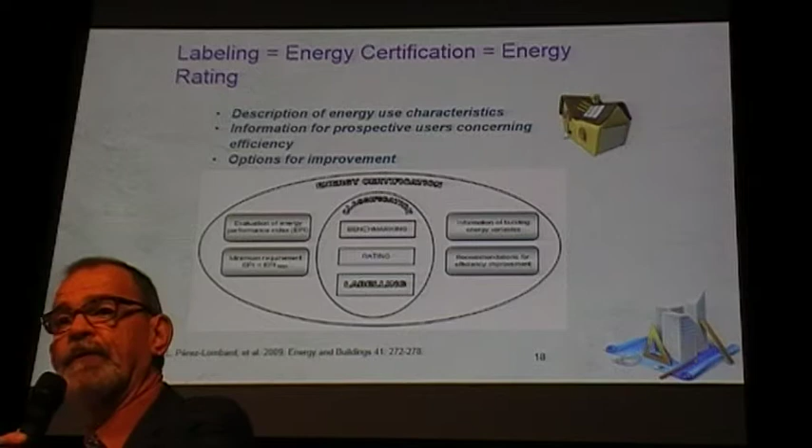And finally, we also call a lot of what we do the same. We say energy labeling is energy certification, is energy ratings, right? Again, all of it means the same thing. So when you're talking to engineers or facility managers or people in the business or the industry and they're using these terms, they are all talking about the same thing.

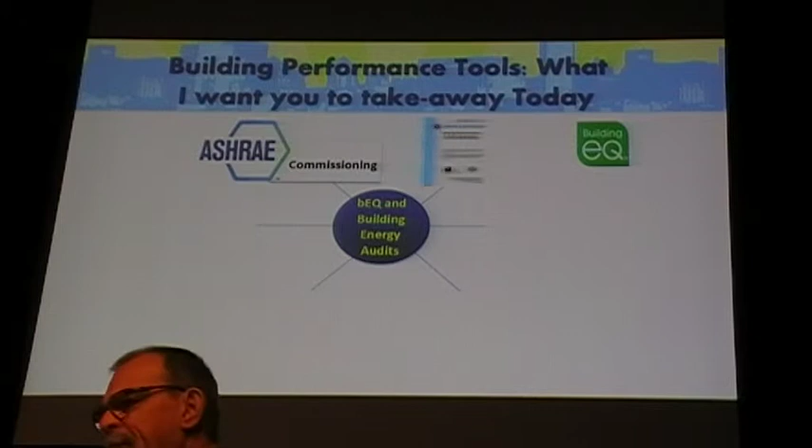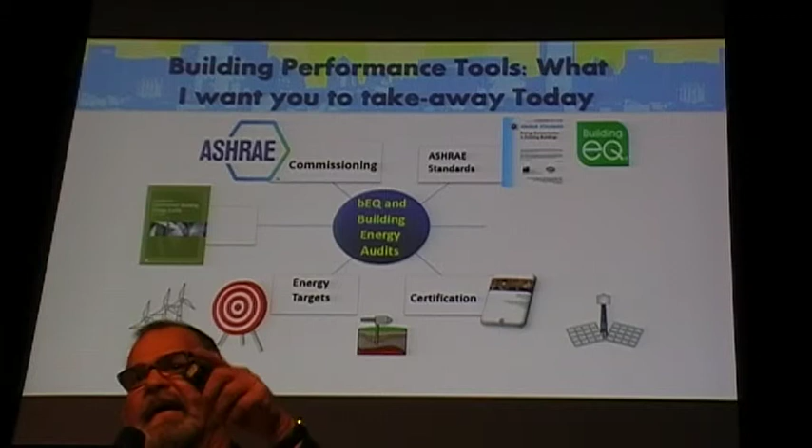So, when we talk about building performance and how a building performs, there are a lot of things that make that building perform. For sure, BEQ is one, but there are a lot of other things that make buildings perform: commissioning, ASHRAE standards, BEQ of course, making energy targets, using energy audits, energy ratings, energy labels - that's another good way. And of course, one of my favorites is becoming ASHRAE certified so that you can do those energy audits and those energy assessments and that energy modeling so that you can actually do that in a standardized way and things like that.

And finally, we never want to forget about the natural resources and the emissions and the great earth that we live in. We still need to protect that, both the indoor air quality inside the building as well as the air quality outside the building.

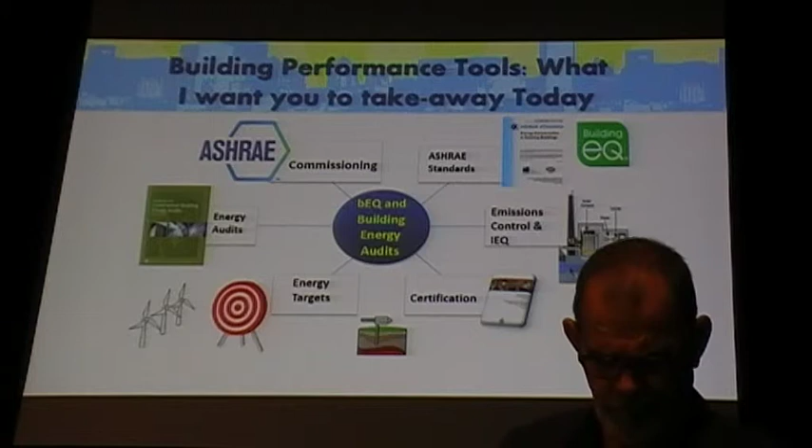Por un lado, lo que tiene que ver con la auditoría energética implica un montón de herramientas para hacerlo, como por ejemplo los estándares de ASHRAE, los targets energéticos que se pongan a nivel de códigos constructivos de la ciudad o a nivel del propietario del edificio. También a nivel de certificaciones que se puedan adquirir, y recursos bibliográficos sobre cómo auditar energéticamente un edificio. Implica un montón de cosas hacer esta auditoría energética.

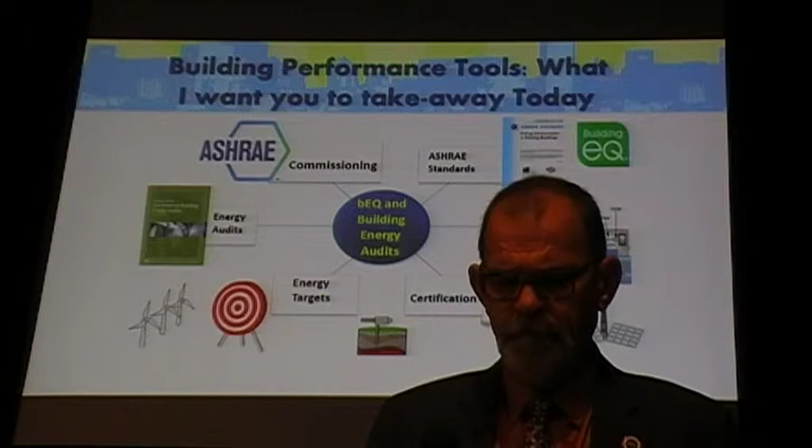Dentro de las cosas que hay que tener en cuenta también está el medio ambiente, como ya habló Nicolás hace un ratito. Son muchas las cosas que se tienen que tener en cuenta cuando hacemos este análisis de auditoría energética.

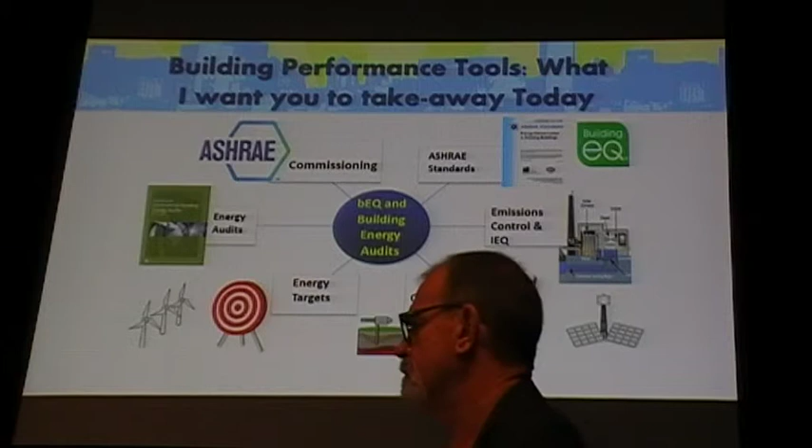Una de las cosas que menciona Ross, que también importa mucho, es que una de las personas mejor preparadas para hacer una auditoría energética es una persona certificada por ASHRAE como BEAP, el Building Energy Assessment Professional, una certificación que implica estudiar un montón de normas y procedimientos de auditoría de edificios. Es una de las cosas que promociona ASHRAE, hacer uno estudiar y certificarse para poder manejar todas estas herramientas. Es una de las personas mejor preparadas para hacer este etiquetado de edificios, algo que la asociación también quiere difundir.

Speaking of certifications, ASHRAE offers 6 certifications, but speaking about building energy quotient, BEQ focuses on the building energy modeling professional and the building energy assessment professional certification.

Como decía recién, hablé de una certificación particular que era la de BEAP, que es una persona que se encarga de la gestión integral de la certificación. ASHRAE lo certifica a través de un examen, que son eso que comentaba Florentino hace un ratito, que participamos del examen hace un día ayer, que se dieron acá en Argentina.

Hay otra certificación relacionada con el commissioning energético de los edificios, con el etiquetado, que es el Building Energy Modeling Professional, una persona capacitada para hacer el modelaje y la simulación energética de los edificios. Es otra certificación relacionada con lo que hablamos hoy de auditorías energéticas de edificios.

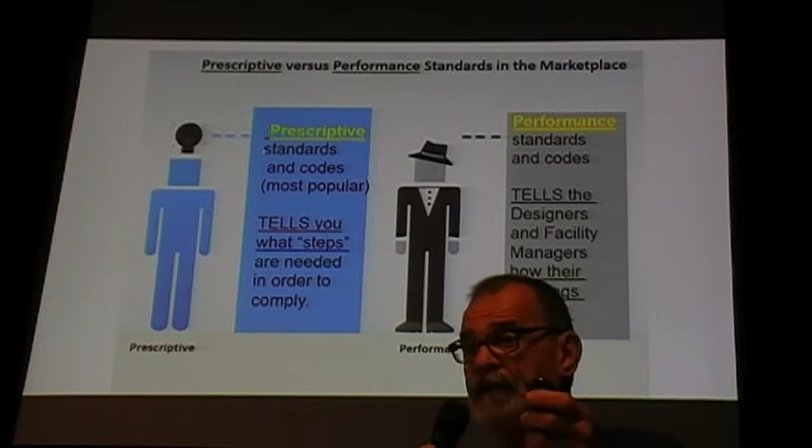This is an example of standards that we will use. When you see the following slides, I will show you copies of standards. Our standards are prescriptive standards or performance standards. Our prescriptive standards tell you what steps to take in order to be approved by that standard, and our performance standards tell you the performance criteria that design has to meet to be approved. So those are the 2 main types of standards that ASHRAE produces.

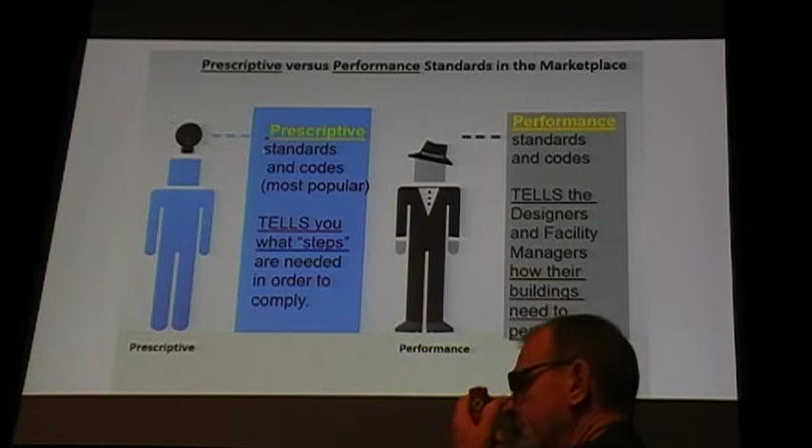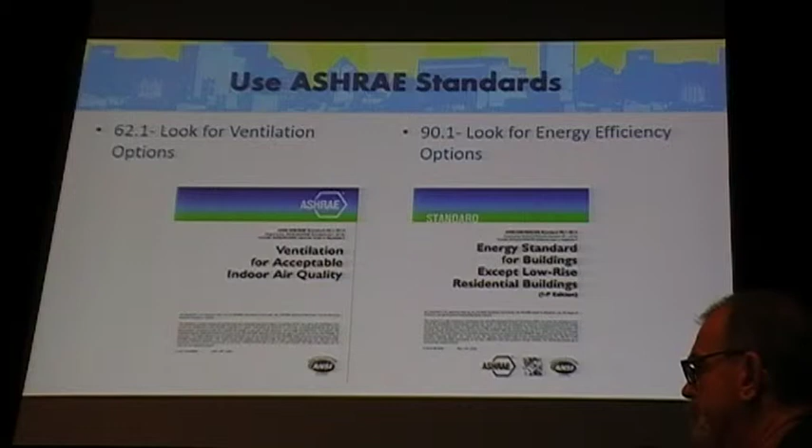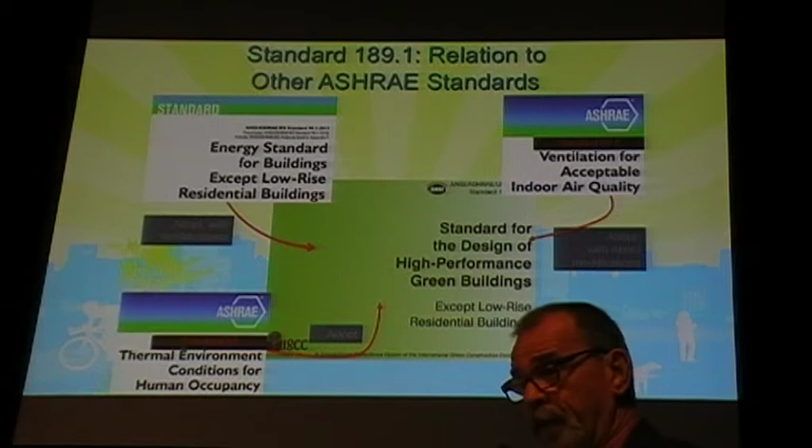This is our ASHRAE High Performance Green Building Standard 189.1.

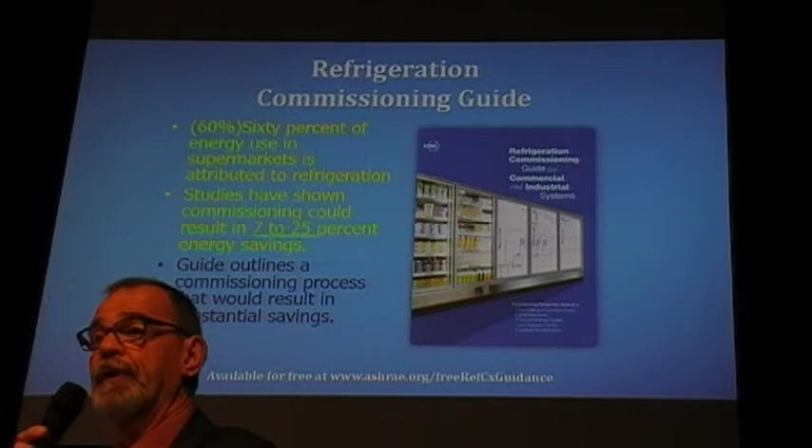This is a refrigeration commissioning guide for refrigeration systems.

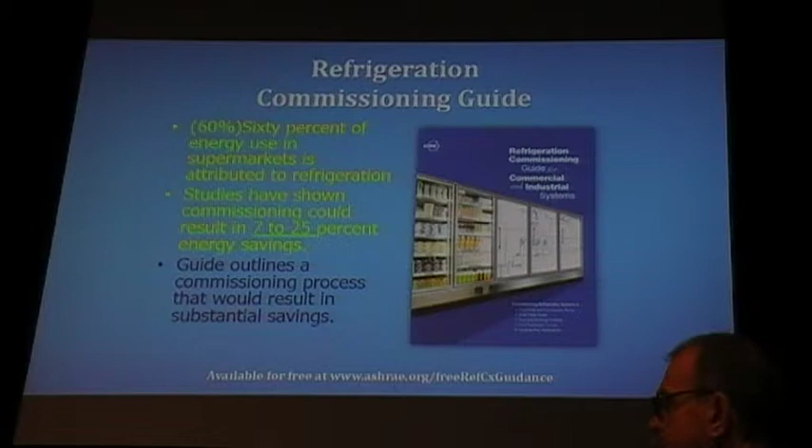We also offer our ASHRAE handbooks now online, so you can still ask for the book, but you can also ask to have your handbooks online when you fill out your annual registration, your annual payment of the invoice each year.

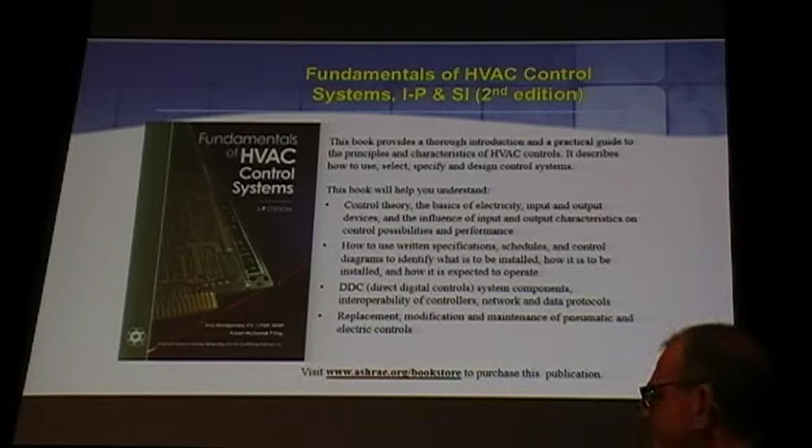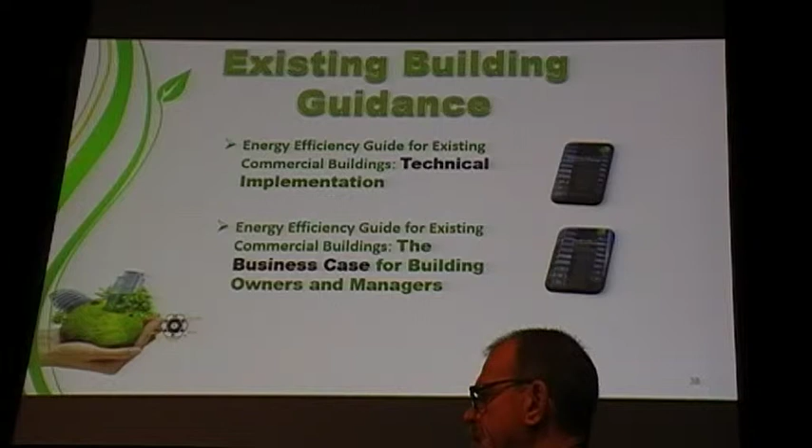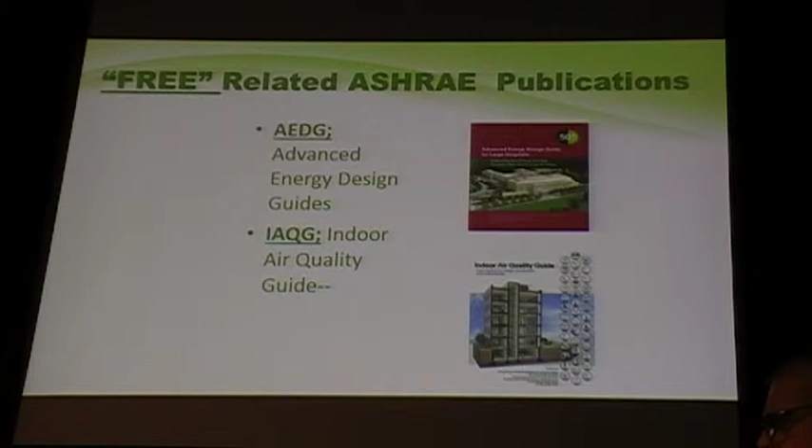And finally, this is not an ASHRAE publication. This is a publication from the U.S. Army Corps of Engineers. But it's a really, really good publication showing you how to control the air pressurization and the air tightness within buildings. So I include this in my presentation because it's available for free as a free download from their website, and it's an excellent resource.

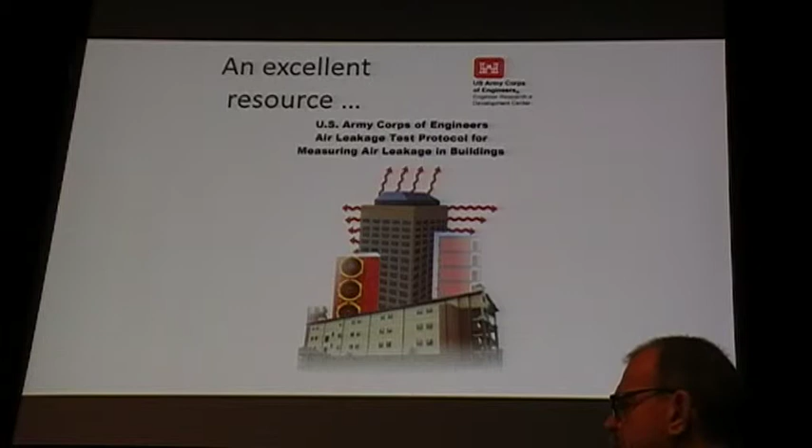So those were a lot of books, right? A lot of publications, a lot of books. But when we do a BEQ submission, we use information from all of those publications at some time, at some point, on some buildings. We use the standards, we use the energy audit information. If we're trying to make energy conservation measures and make the building better, sometimes we have to make the building more airtight. So we're always using these publications to make those buildings better and to try to achieve a higher grade.

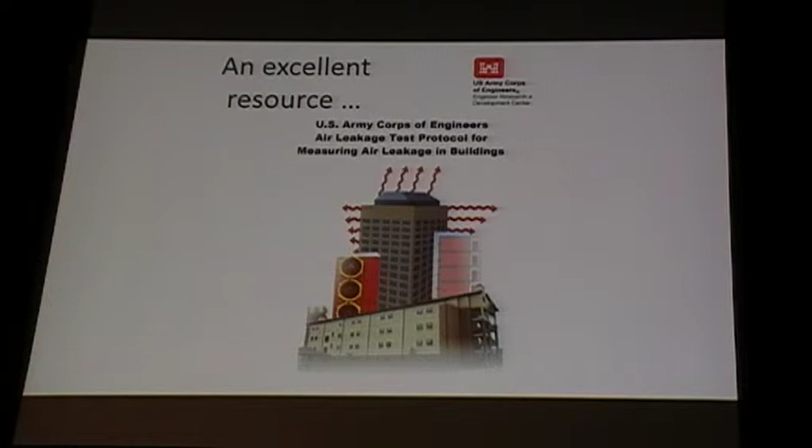So now we talk about two new things. Do you know there is not a standard in the world for building energy labeling or rating? There's not a standard in the world that says how to do it. There are some ISO standards, I'm talking about in North America, South America, in our part of the world, let's say that. And there's not a standard in our part of the world for energy audits, on how to do energy audits, and what is the right way to do that.

So ASHRAE 2 years ago decided that they would make a standard on both energy rating and labeling systems and energy audits for our half of the world. So that's what we've been doing for 2 years. ASHRAE standard 211P and 214P. And I'm on the 214P committee, which is the ASHRAE label and rating standard. And we're probably about 3 to 6 months away from publishing the standard.

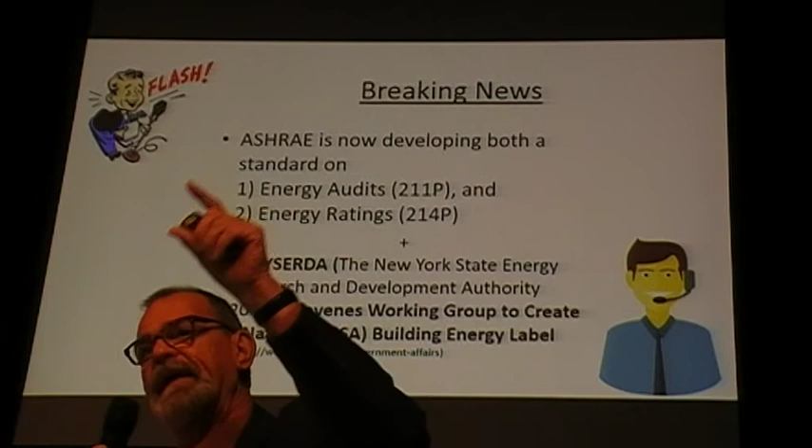So we're very near to actually having a standard of care for our half of the world. And my understanding is that the 211P committee is also very near. I'm told they are very near. So we will have 2 new standards of care for both energy rating and labeling and for energy audits for our part of the world.

So, start to talk about specifics of BEQ and a view from very, very, very high. So I'm going to answer some very, very simple questions about BEQ, building energy quotient. Why, what, how, and how much? Those are the simple questions we will now finish with.

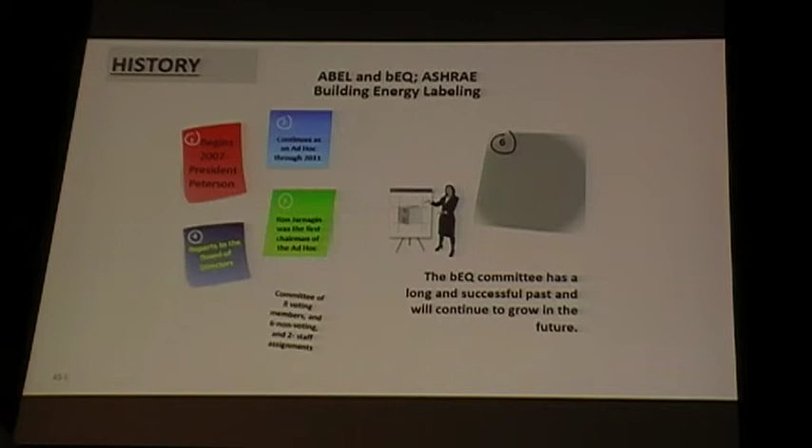What is BEQ and when did it start? We started in 2007, a long time ago. We are a committee of 8 voting members, 6 non-voting members, and 2 staff members. We report directly to the board of directors of ASHRAE, and we've been working very strong for a lot of years to create this program. We have almost a $1 million budget, so we have been working quite a long time.

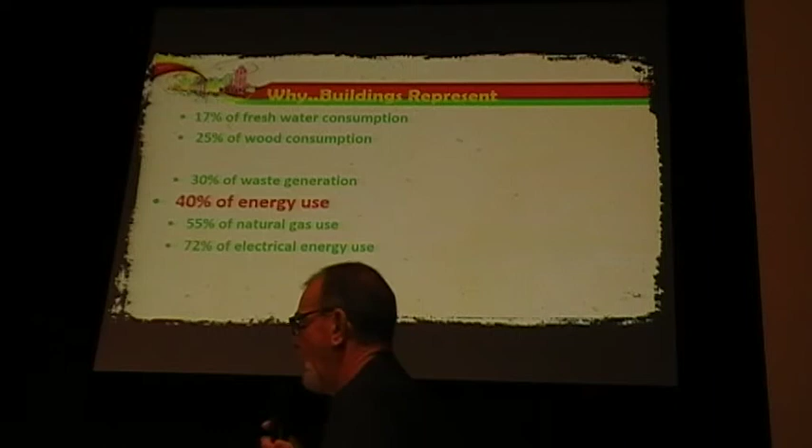Why? Because buildings use almost 40% of the CO2, and definitely 40% of the energy use in a building.

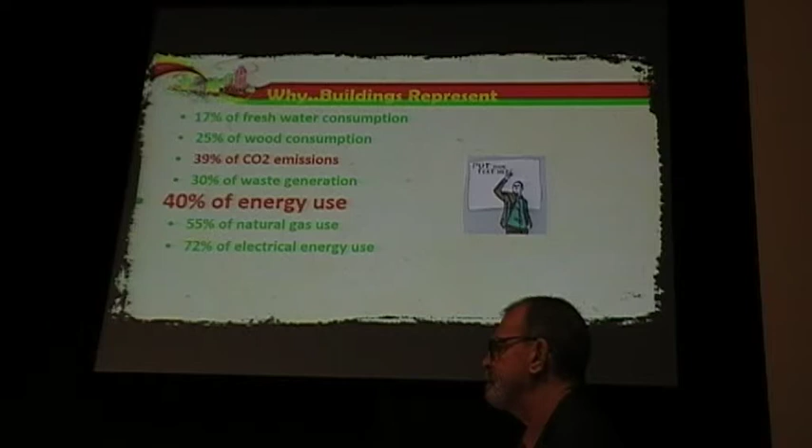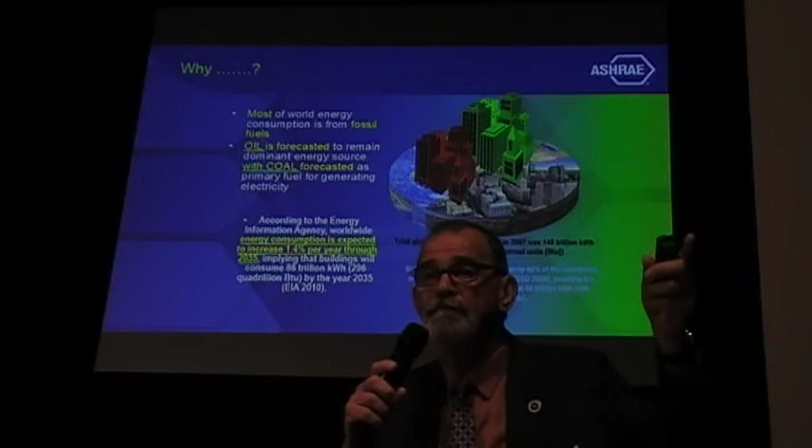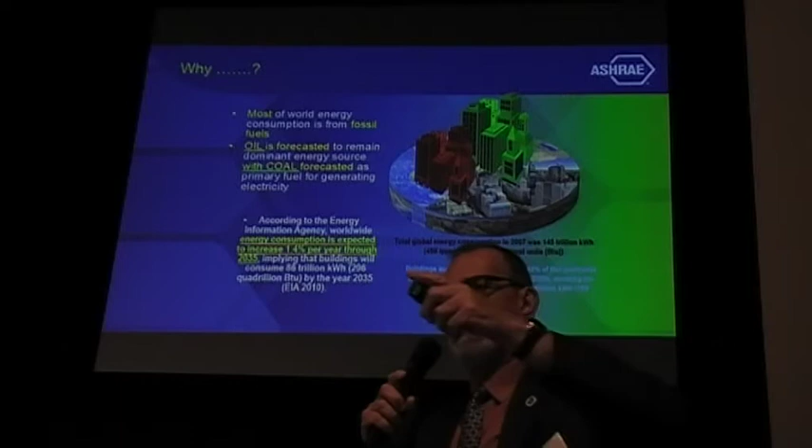Why? Because most of the world energy consumption is still going to come from fossil fuels. And fossil fuels are not good. They are not good for the environment. And we're having all of these problems with the environment and the outside air. And where's it coming from?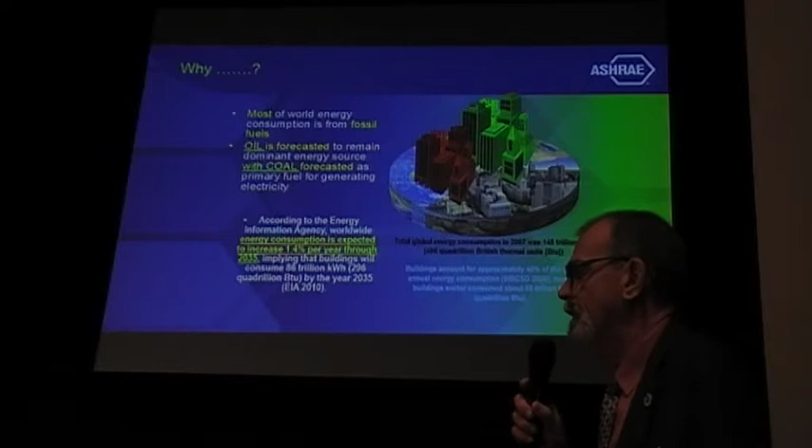So oil is still forecasted to remain the dominant energy source, and coal is still forecasted to be the dominant energy fuel.

Why? Because it's cheap, and we cannot stop people from buying cheap. So as I told the students the day before yesterday, the students are going to have to figure out how to change the world, because we're not doing a very good job, right? So our students are going to need to figure a way to change the world.

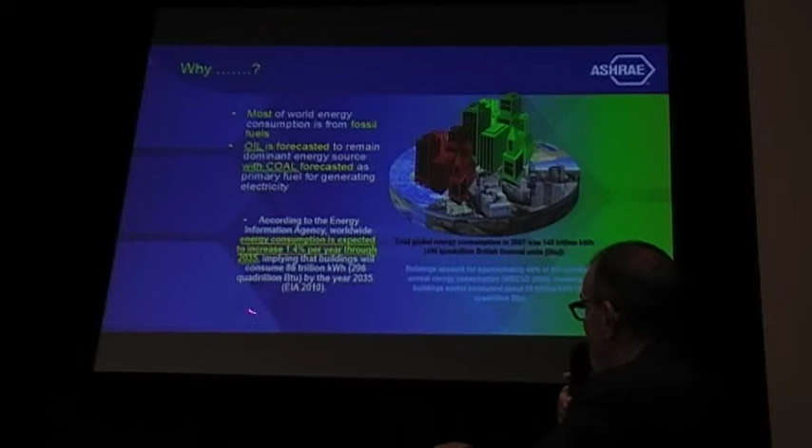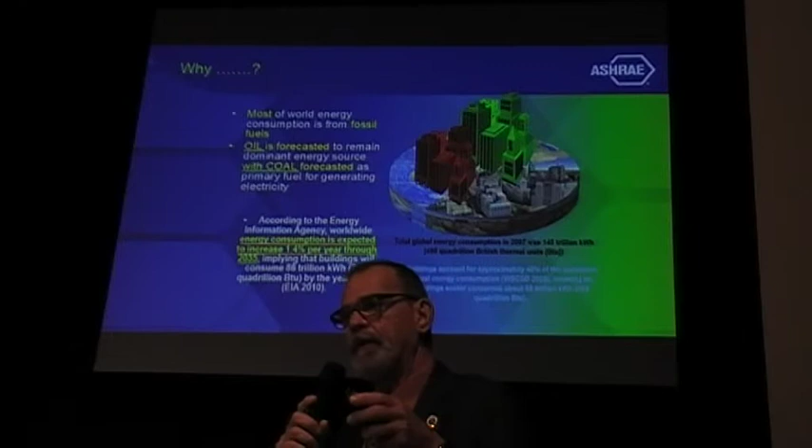And finally, according to the Energy Information Agency, worldwide energy consumption is still forecasted to increase 1.4% per year through the year 2035. So everything you hear about energy use going down is not what the experts are telling us. The experts are telling us that energy consumption worldwide is going to go up.

So, I don't know what to do. Where are the students? We need the help.

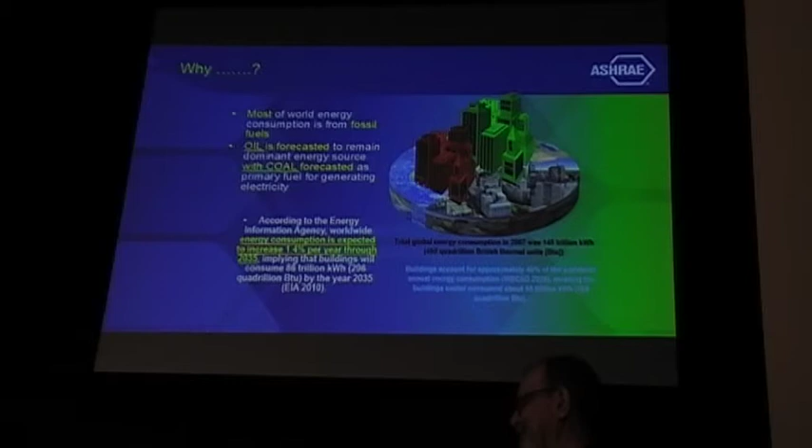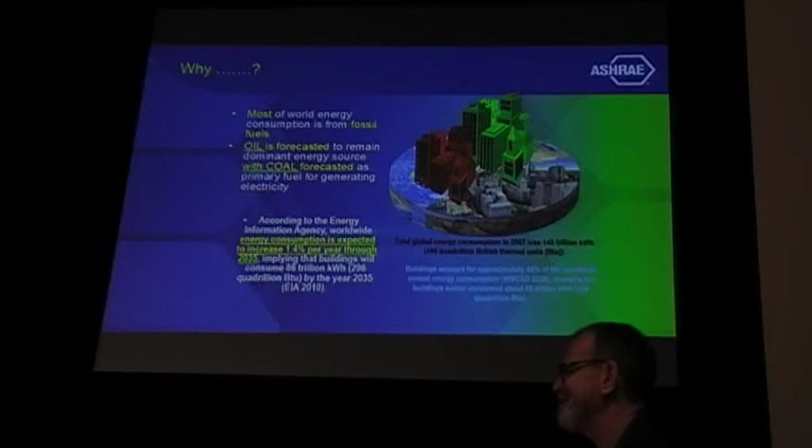So, I really like this slide because as a mechanical engineer, it means that we have power as in heating, ventilation, air conditioning, refrigerating, and a little bit of electrical lighting engineering. We have 75% power in a building. So the air conditioning and lighting in a typical office building consumes about 75% of the power. So our profession has 75% control over the energy of that building. So I think that's really good, I think that's great. So, I like this slide.

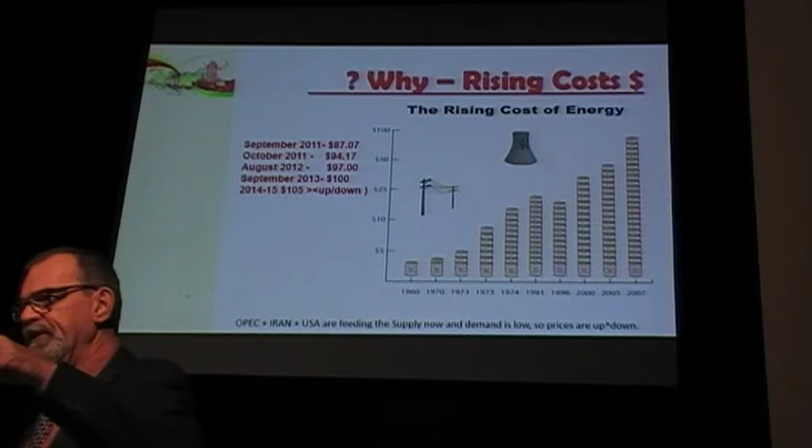Why? Of course, the rising cost of energy. Energy continues to go up and up and up and up, and it just doesn't stop.

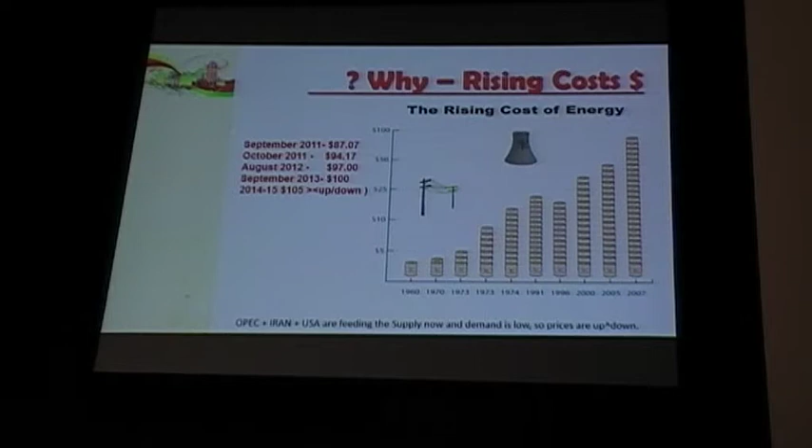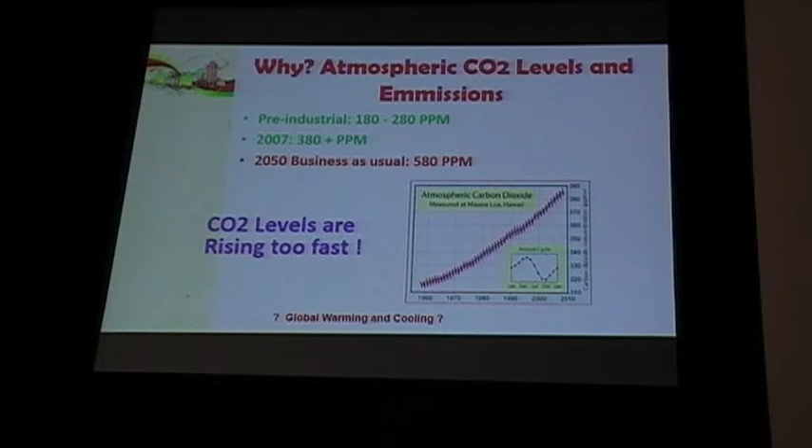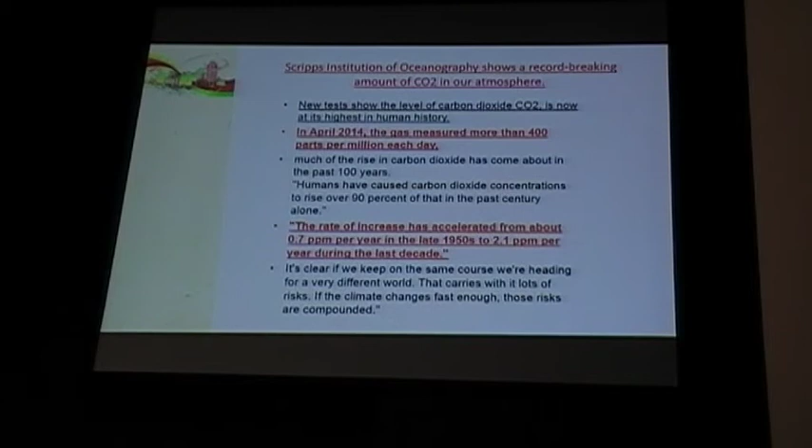This is a report from the Scripps Institution of Oceanography that says, in April 2014, they're now measuring a baseline of 400 parts per million outside. That's not good, that's the wrong direction. And the rate of increase has now accelerated from less than 1 part per million per year to now greater than 2 parts per million per year for the last 10 years. So we're going in the wrong direction real fast. CO2 is a real problem, and it is a problem that we need to pay attention to in our generation.

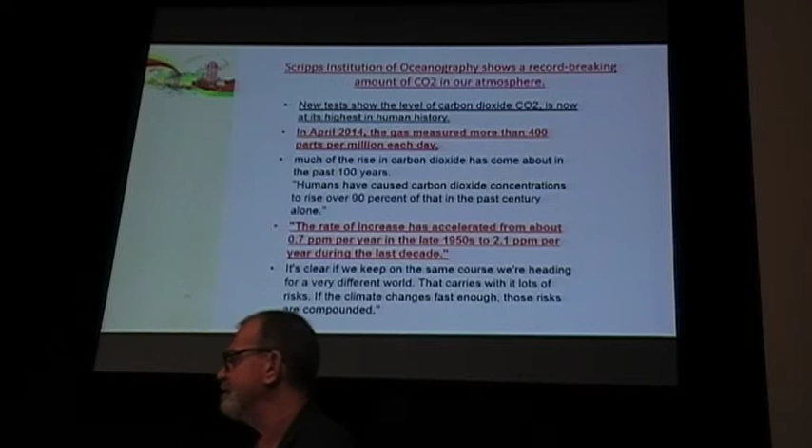Okay, I'm joking. This is my attempt at a joke.

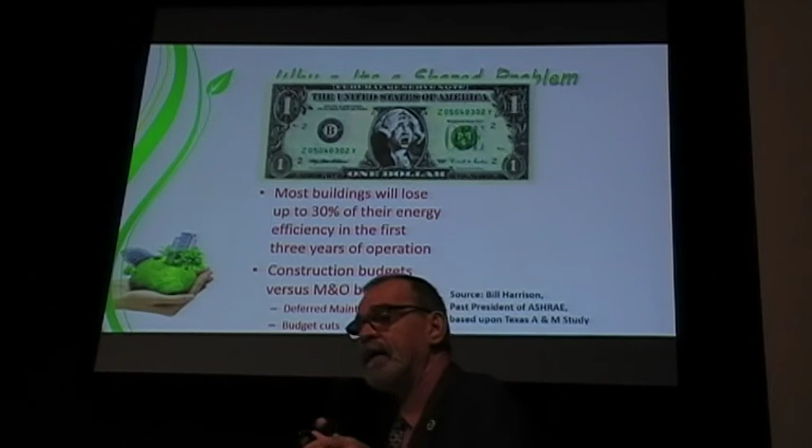Our energy problem is a shared problem. It's a shared problem by a lot of people, and it's a shared problem even after the building is built. Because after the building is built, they have to maintain and operate it, and costs take money away from the facility manager. They defer his maintenance, they defer his budgets, they take money away from him so he cannot properly maintain his building and continue to make energy saving opportunities in his building. So we need to try to help the facility operator save more energy in his building, and BEQ can do that.

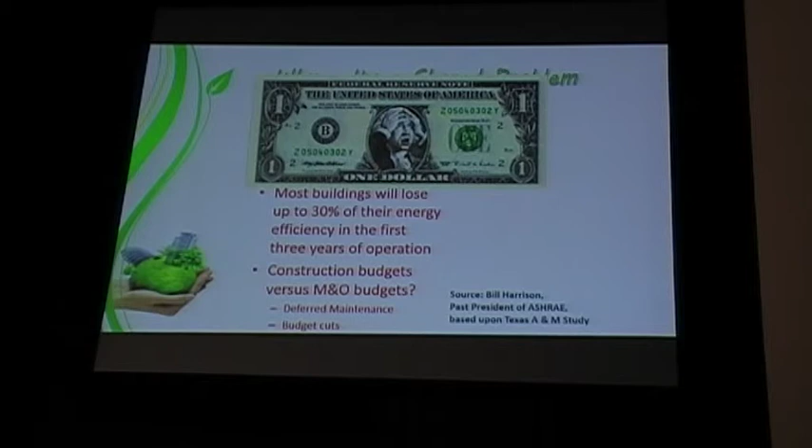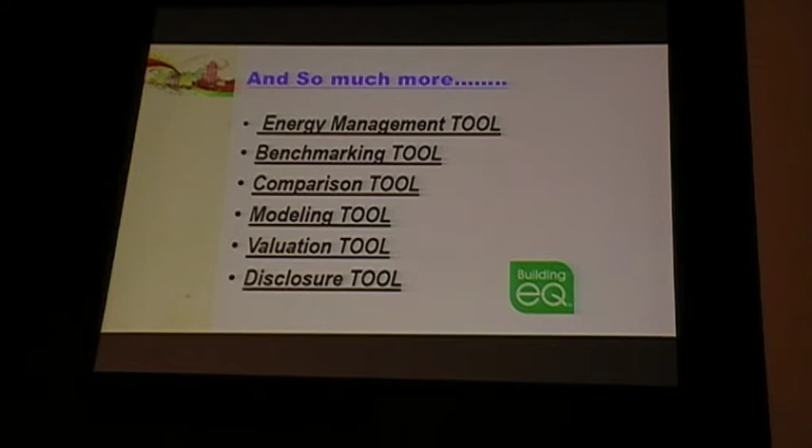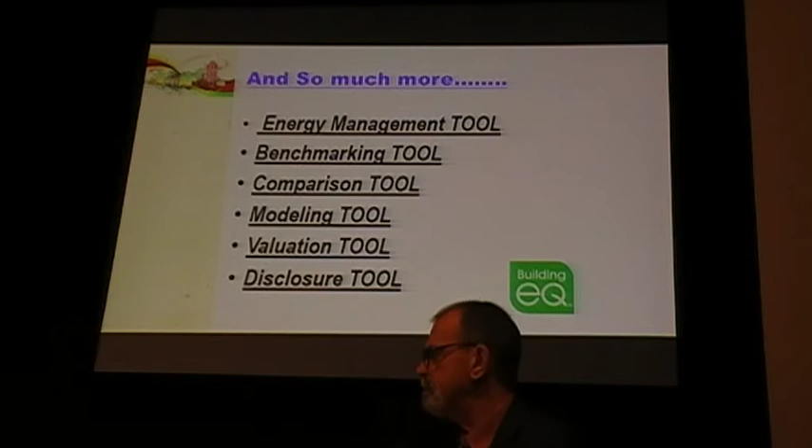Es una buena herramienta de comparación. Dio el ejemplo de la UCES, que tiene muchos edificios con una utilización similar: gente estudiando o participando, en este caso, de conferencias como esta. Al tener muchos edificios, uno puede tener un punto de comparación. Como esto es cantidad de utilización de energía por metro cuadrado, independientemente de la superficie que tenga el aula o lo que fuese, uno ya tiene una herramienta de comparación de cuánto consumen determinados edificios, en este caso hablando de la universidad. Sabiendo eso, uno puede comparar entre edificios y darse cuenta si son energéticamente eficientes.

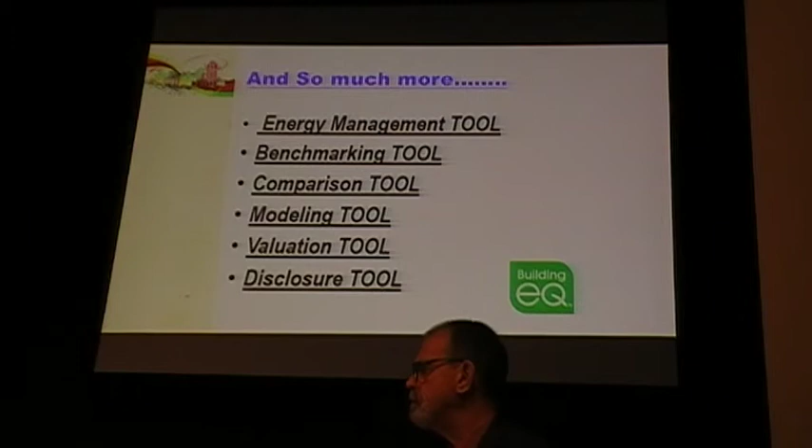And if your building is a commercial building that buys and sells on a real estate market, we use the BEQ Building Energy Quotient to increase the value of a building, because if a building uses less energy per square meter, then it is worth more to sell to a new owner, the same as a car that uses less gasoline is worth more to you.

De la misma manera, es importante para el mercado de real estate porque, al igual que un auto que sale más caro porque consume menos energía, el propietario de un edificio, de un piso, de un departamento, de una oficina o lo que fuese, de real estate, va a tener un bien más caro porque consume menos energía. El concepto es igual que en un automóvil: uno quiere un automóvil que consuma lo menos posible y va a pagar más caro por eso. Entonces, desde el punto de vista del real estate, la inversión y el valor del bien, es algo muy importante.

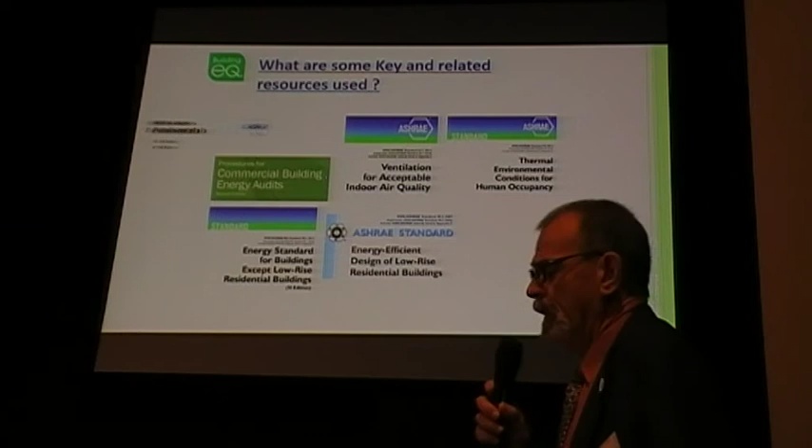So I just want to go by and show you some key resources that we use in BEQ. The top is the ASHRAE Fundamentals Handbook, the standards that we already looked for, and then over on the far right is a lighting handbook.

Bueno, ahora les voy a mostrar algunos de los principales recursos para hacer el commissioning y el etiquetado energético. En la esquina superior izquierda habla del Fundamentals, que es este manual para realizar las auditorías energéticas. Luego, en la parte inferior derecha, el handbook o manual de iluminación.

And we like to highlight ASHRAE Standard 100 because it's the energy standard for existing buildings, and we use this standard as our absolute base for our energy utilization index numbers. Este sería como el estándar más importante, que es el estándar 100 de eficiencia energética de edificios existentes.

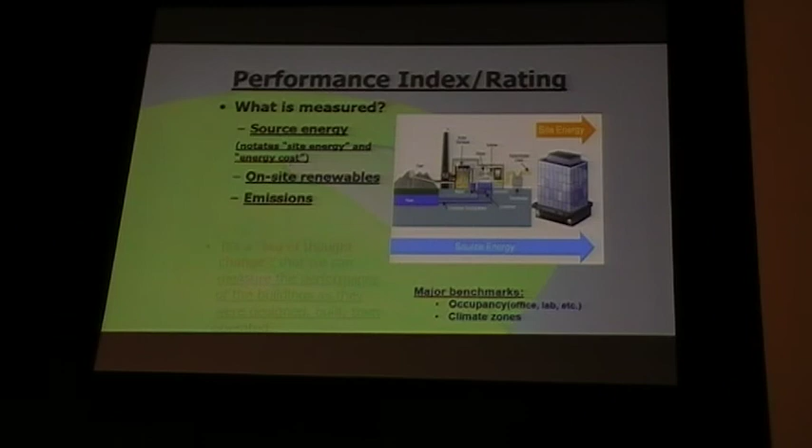So what do we measure in BEQ? When we do a submission, we measure what we call source energy. Source energy is the energy at the site, but it also includes the energy that it takes to get it to that site, so we call that source energy. We also look at on-site renewables, as well as emissions, because we believe that emissions are very important and that indoor air quality is very important to consider in the BEQ submission.

¿Qué es lo que se mide en este proceso de etiquetado? Por un lado, lo que se denomina source energy, que sería lo que consume el edificio energéticamente y el costo que tiene esa energía. Luego, las energías renovables en el sitio, si es que las tuviese, que es importante considerar en cuán eficiente es un edificio. Y las emisiones son también muy importantes para considerar en el consumo energético de un edificio, qué cantidad de emisiones produce.

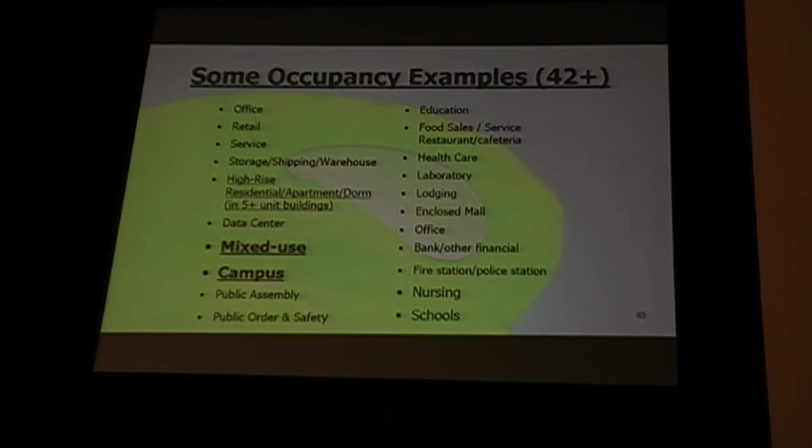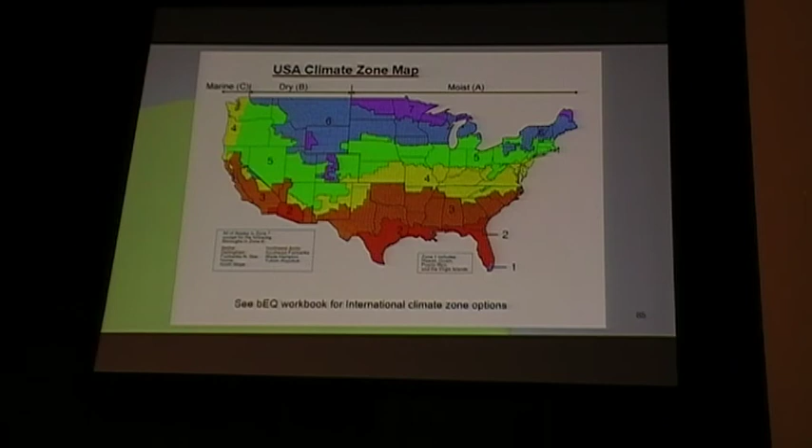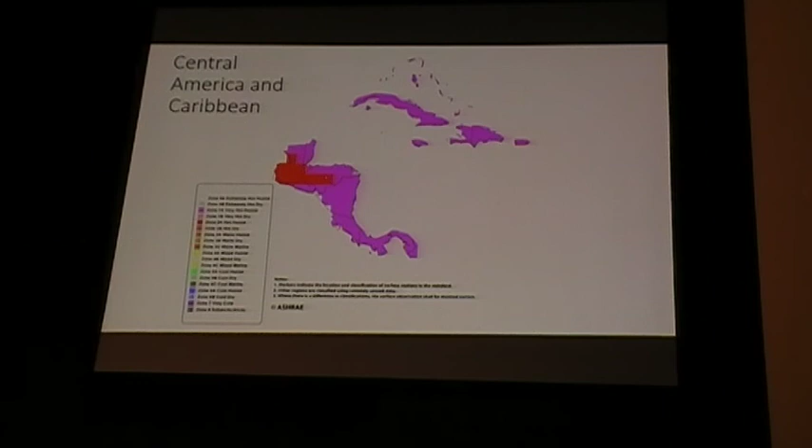So here's some examples of what those weather maps look like, and those are available for free from ASHRAE. ASHRAE Standard 169 is available for a free download from the ASHRAE website, and you can get these maps and that information.